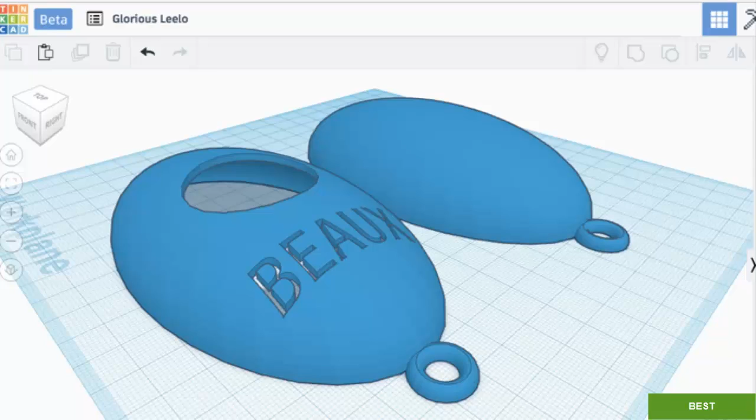We're going to be modelling the Pobble BEAUX carrier bag reuse container, and in this lesson we'll begin by creating a half sphere with a keyring attachment. After completing this lesson you'll be able to use Tinkercad to create a half sphere using solids and holes, use Tinkercad shapes to create a keyring holder, and use Tinkercad to align parts.

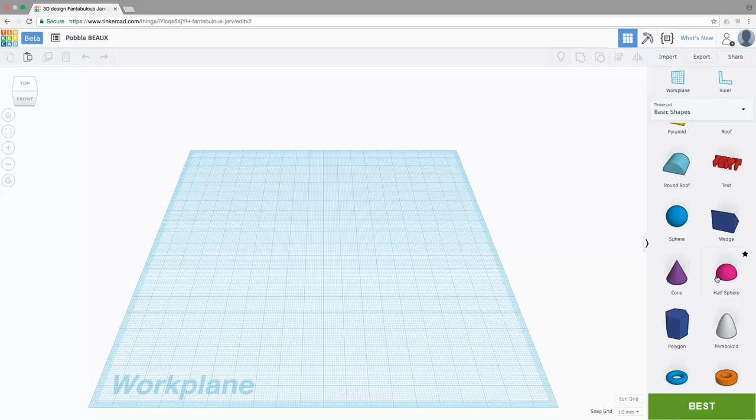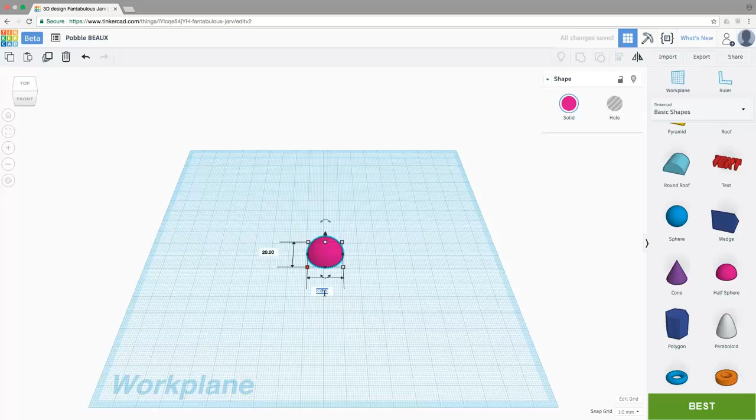In the Shapes panel, grab a half sphere and drag it onto the work plane. To begin modelling, we need to change the size of the half sphere. We can do this by clicking and dragging the form to the size we require, or we can enter the dimensions directly. Let's click the lower left square, then enter the dimensions directly. Let's select and enter 120mm for the length, then tab on the keyboard and enter 70mm for the width, then press return. And let's select the square to change the height also, from 10mm to 25mm.

Now let's click and drag our edited half sphere form to move it to the centre of the work plane. Next we'll create the keyring holder for our Pobble BEAUX.

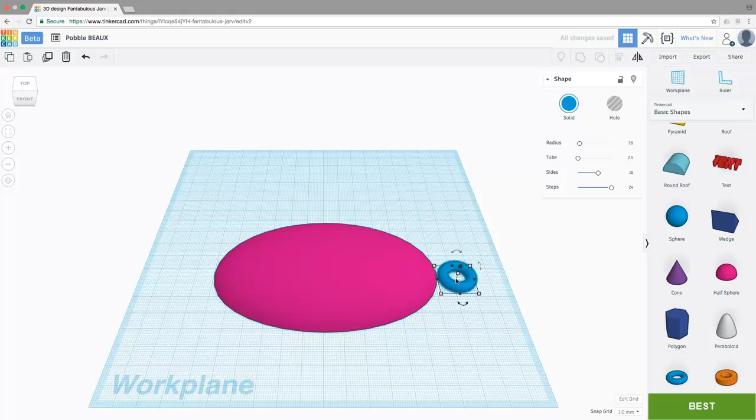So let's click and drag a torus from the Shapes panel and place it on the work plane near the half sphere. We'll need to edit the dimensions of the torus, and we can do this by dragging or entering the values directly. Enter 15mm for the length, 15mm for the width, and 6mm for the height.

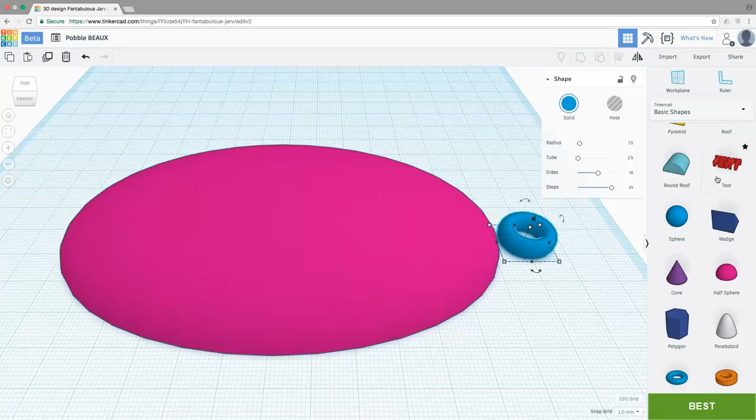We're building our product in two halves, which we'll need to hollow out, and then we'll 3D print them. Click and drag a box hole from the Shapes panel and place it on the work plane near the keyring holder. We'll use this to remove the lower half of the keyring holder.

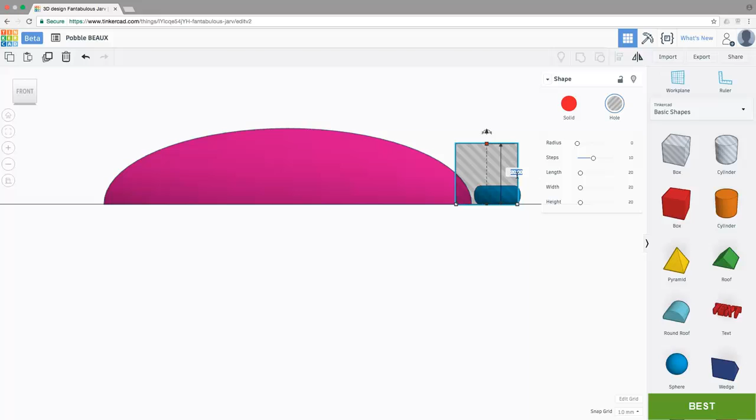Now use the View tools to switch to an orthographic view. Then use the View cube to click for a front view. This will make it easier to change the height of our box hole in order to make the cut on the keyring holder. We want to change the height of the box hole from its 20mm default to 3mm, and we can do this by either dragging it or entering the measurement directly.

And we can use the View cube again to click for a top view. With a top view we can click and drag the box hole over the keyring holder so that when we do make the cut it cuts half of the entire keyring holder.

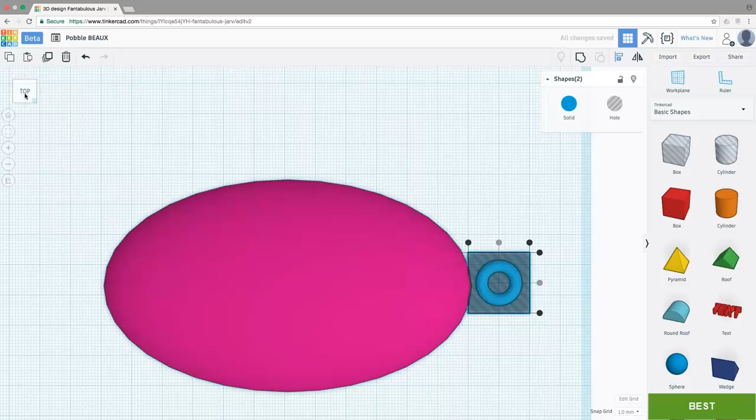To make the cut we're going to select both the keyring holder and the box hole. In the sub nav bar we click the Align tool, then click the dots to align centre length and width. Again we can use the View cube to click for a front view. Then in the sub nav bar click Group, and this removes the lower half of the keyring holder.

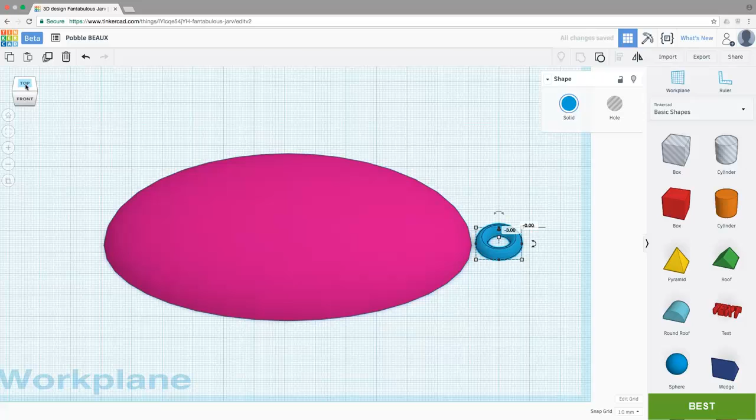Now all we need to do is click the arrow and drag the remaining upper half of the keyring holder down -3mm to be flush with the work plane. Then use the View tools to switch back to a perspective view.

We're now going to hollow the Pobble part and group it with the keyring holder. After completing this lesson you'll be able to use Tinkercad to create a second half sphere and specify its dimensions, use Tinkercad to create a hole and hollow the first sphere, and use Tinkercad to align and group the parts.

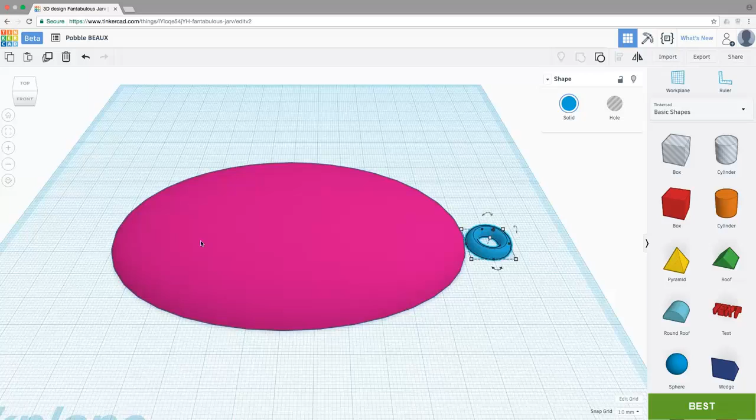In order for our Pobble BEAUX to be a container, we need to hollow out the part that we've just created. And to do this, we're going to create a second half sphere with slightly smaller dimensions, which we'll use to hollow out our Pobble part.

So let's click and drag another half sphere from the Shapes panel and place it on the work plane just above the first part that we've just created. Let's alter its dimensions to 118mm in length, 68mm in width, and 23mm in height. And then in the inspector let's select Hole and change the shape from a solid to a hole.

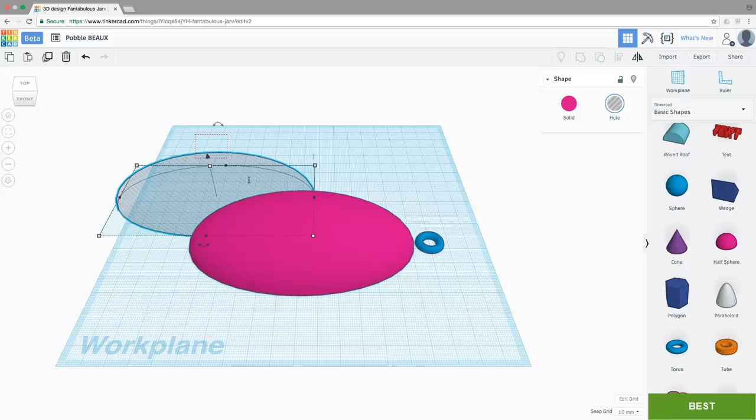Now we can select both parts, and in the sub nav bar we can click Align. Click the black dots to align to centre both length and width, and then in the sub nav bar again click Group. This removes the material that we no longer want.

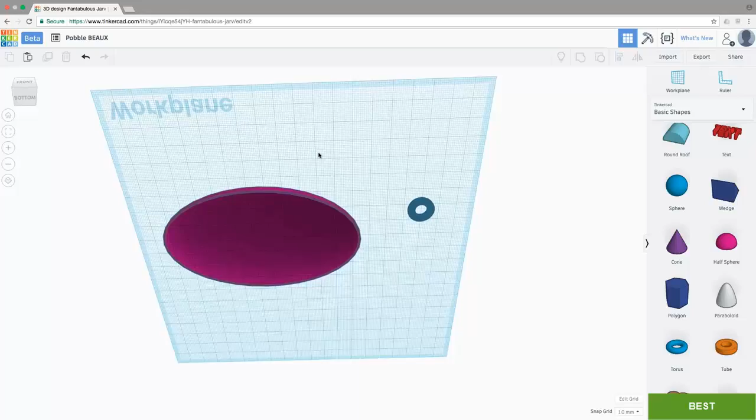Now we can use the View cube or the Orbit tools to survey the part and confirm that the material has been successfully removed. With the material removed, we now need to align and group the keyring holder with the hollowed Pobble part.

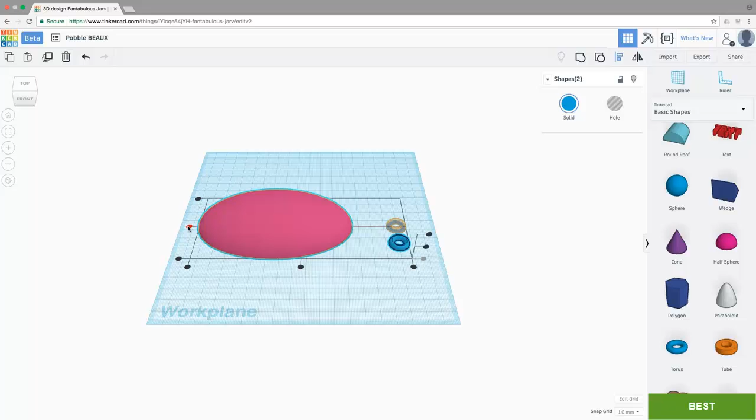Select both the Pobble part and the keyring holder, and then in the sub nav bar click Align. Click the black dots to align to centre by width, and then click and drag the keyring holder to merge with the hollowed Pobble part.

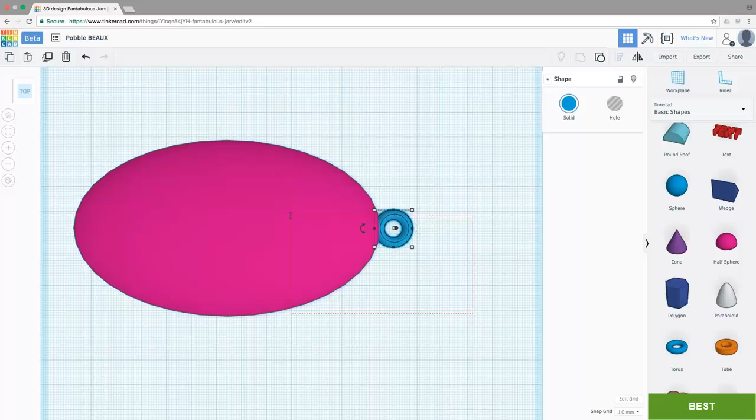This is easier when using a top view, so in the View cube click Top. Now click and drag the part. You may wish to hold Shift on your keyboard so the keyring holder part snaps to a horizontal line. Now select all the parts and click Group.

And that's the first half of our Pobble BEAUX complete. In the next demonstration tutorial, we'll create the other half of the Pobble BEAUX and then add some text, a hole, and export the design for 3D printing.

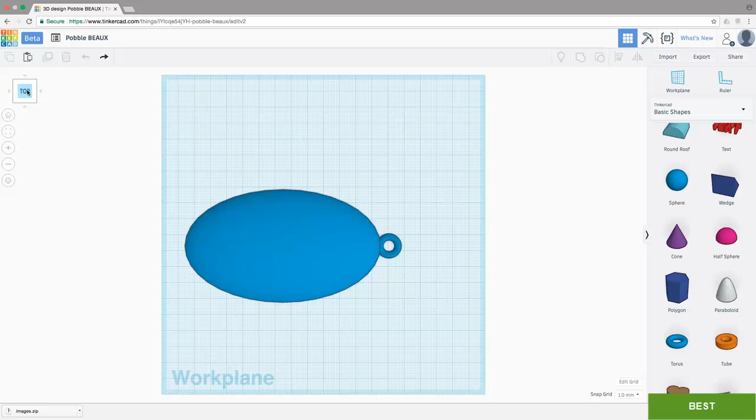Now hold down the Shift key, click and drag the new part up so that you can see it. So we now have two identical parts, which we can join to make the complete product. But before we do that, let's put a hole in one of the parts. After completing this lesson, you'll be able to create and cut a hole in the Pobble part and use Tinkercad to align and group the parts.

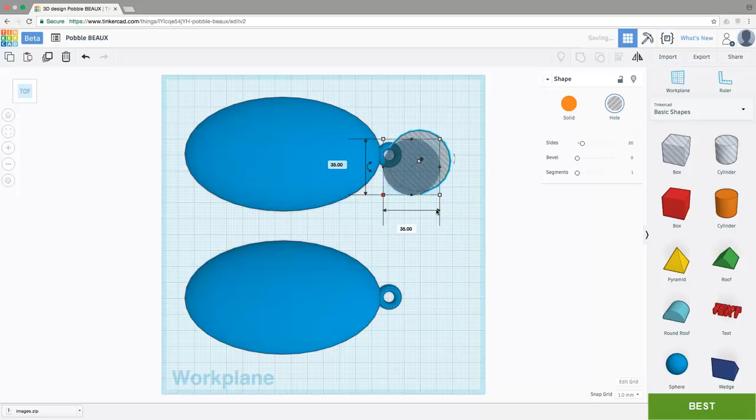So let's begin by dragging a cylinder hole from the Shapes panel and place it on the work plane just to the right of the duplicate part. Now let's resize the cylinder hole, 35mm in length, 35mm in width and 30mm in height. Now click the duplicate part and in the subnav bar click Ungroup. Select both the cylinder hole and the duplicate Pobble part.

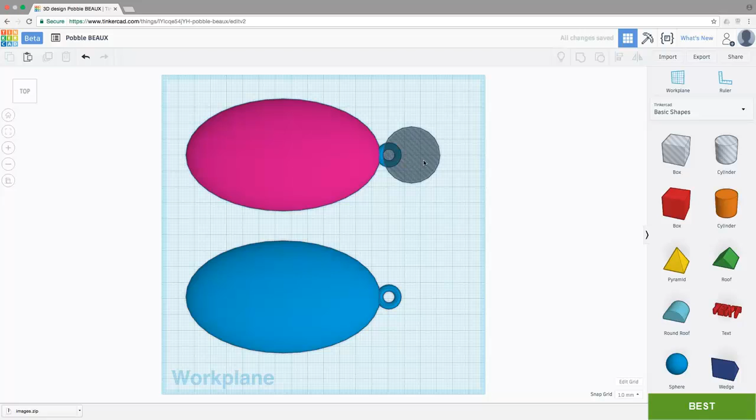Click Align, click Top on the view cube and click the black dot to align the width of the cylinder hole with the duplicate Pobble part. Using the view tools, switch to an orthographic view. This will make it easier to position the cylinder hole. Now you can click and drag the cylinder hole and position it wherever you want. I'm going to center mine.

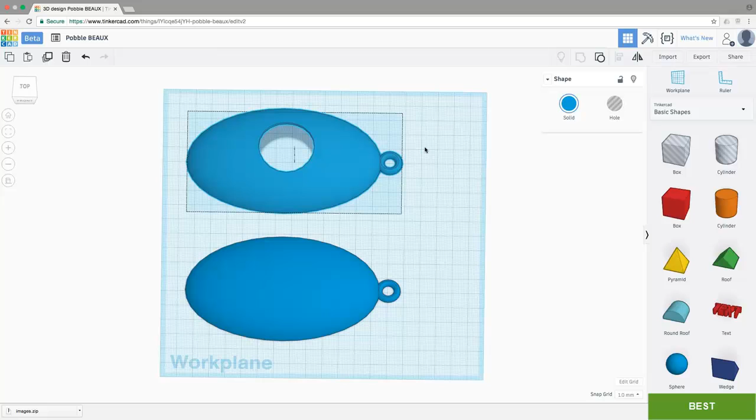Now select all of the duplicate Pobble parts, including the cylinder hole. Then in the subnav bar, click Group. This will group the parts and also cut the hole. In Tinkercad, we can also add text to a part. So let's add text to the other half of the Pobble BEAUX. After completing this lesson, you'll be able to position and add text to the Pobble part using Tinkercad.

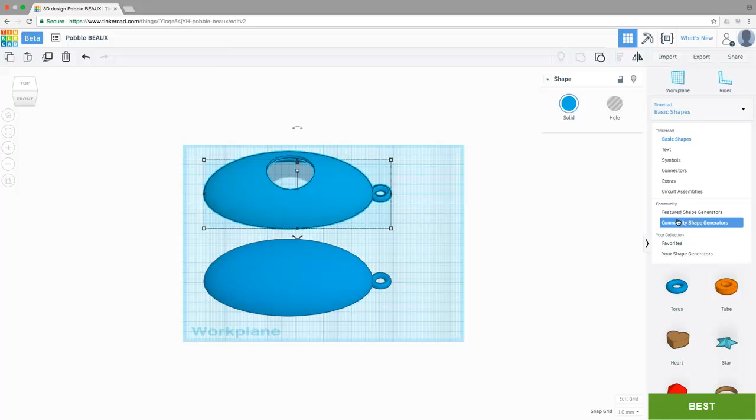Use the view tools to click for a home view. In the Shapes panel, click Basic Shapes and select Community Shape Generators. Shape generators are JavaScript programs that generate 3D geometry based on a set of visual inputs provided by a user. So you can generate your own shapes from 2D curves that are extruded, or by directly building a mesh. To add our text to the Pobble BEAUX, we're going to use a shape generator provided by a Tinkercad user and shared with the community.

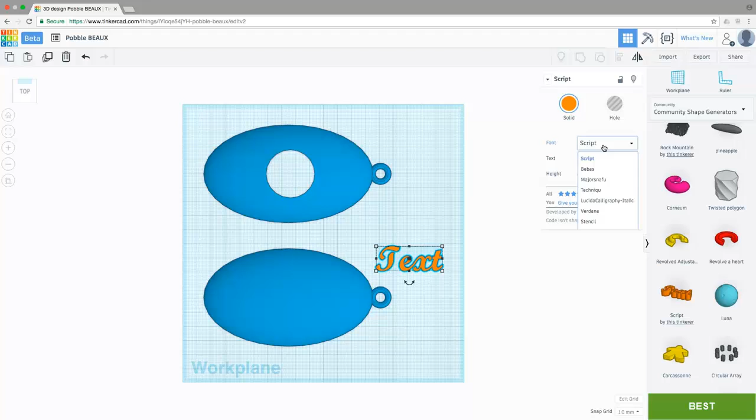Scroll through the shape generators, locate a shape generator called Script. Now click and drag the Script shape generator onto the work plane. Use the view cube to select a top view, and then in the text inspector, change the font from Script to Stencil. Select the default text and change it by typing BEAUX or another word of your choosing, and also change the height to 30.

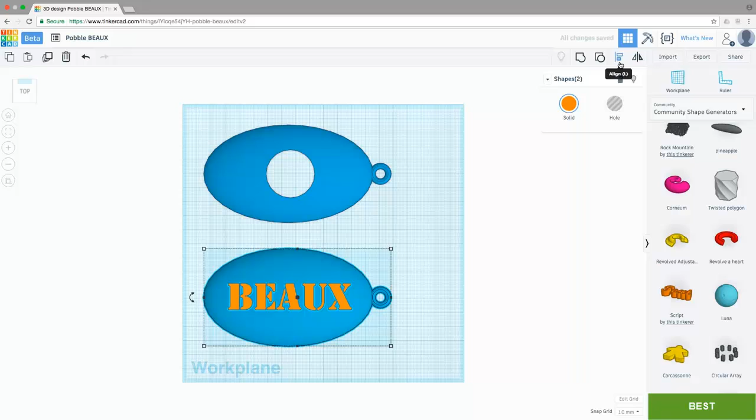Now click and drag the text and position the text wherever you want it. You can do this by dragging the text, or you can use the align tools, like I'm doing here. I'm going to align the text to the center width. Once you're happy with the position of the text, use the inspector to change its status to a hole in order to cut through the Pobble part. Then select all the component parts and click Group. This will also cut the text from the Pobble part.

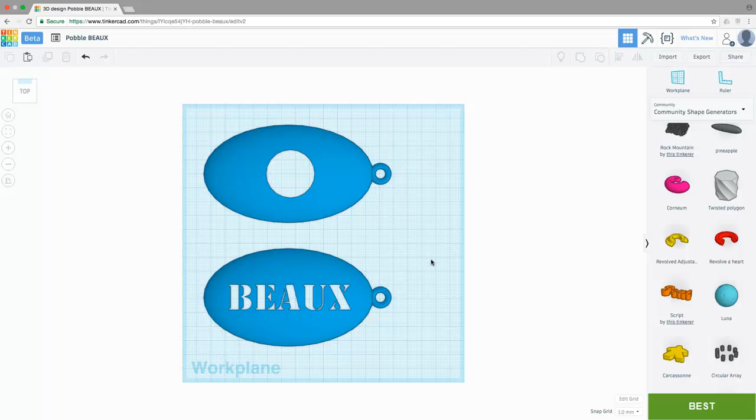So that's our Pobble BEAUX design complete. All that remains for us to do now is lock the parts from further editing and export the file for 3D printing. After completing this lesson, you'll be able to lock both Pobble parts to prevent further editing. To lock the parts, select the grouped part and in the inspector, click the lock icon. Do this for both parts.

If you need to do further editing on them, don't worry because we can unlock these again. Simply click the part, then click the lock icon to unlock them. Now we can export the design for 3D printing. After completing our final Tinkercad lesson, you'll be able to create and download an STL file for 3D printing.

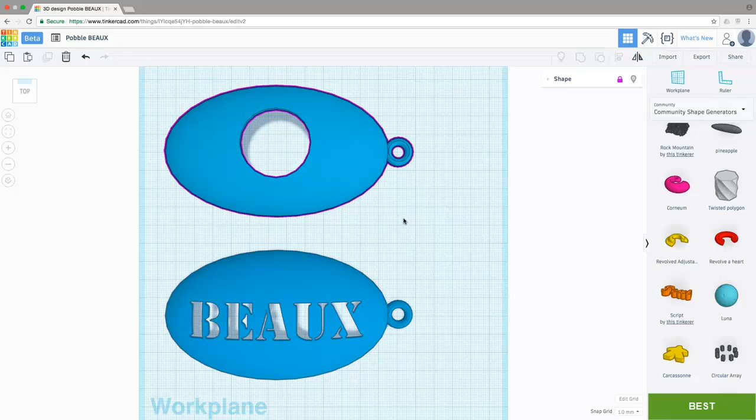To create and download an STL file for 3D printing, click to select the part, and in the sub-nav bar, click Export. Select to include the selected shape, then select the format STL. This will automatically save out the file to a specified location according to your browser settings. And you can repeat this process for the other part.

In Tinkercad, there are a number of ways that you can share your work. In the sub-nav bar, click Share. You can share a snapshot of your design via social media or via download. You can send it to Thingiverse or MyMiniFactory, and you can also share a link over instant messaging or by email. If you click to invite people and then click to generate a new link, you can share this new link with anyone that you wish.

And this completes the Tinkercad demonstration tutorials for the Pobble BEAUX carrier bag reuse container. Don't forget that our Fusion demonstration tutorials will show you how to import the Tinkercad STL file into Fusion, where you'll be able to use Fusion's powerful parametric and freeform modelling tools, as well as its photorealistic rendering workspace to refine and manufacture the design.